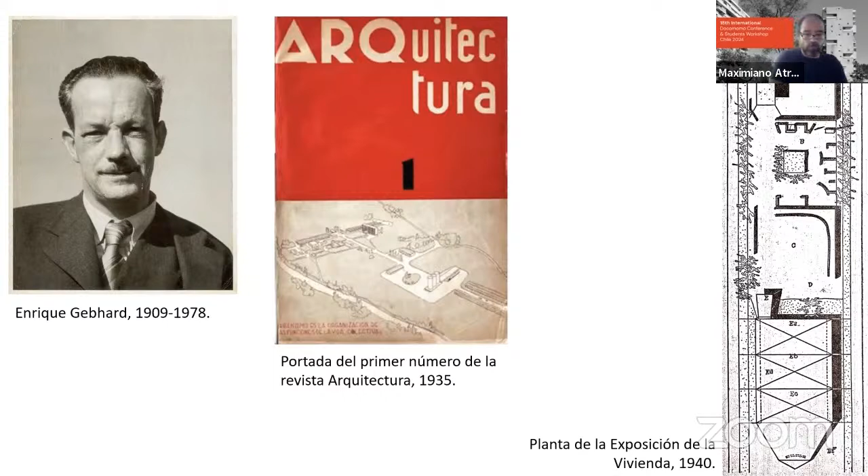In my opinion, the most interesting aspect of this chronology is that the project was developed in several stages. It was not built in one moment, probably due to the financial difficulties of the university during the Second World War, preventing construction of the entire complex as originally planned by Gebhard in 1941. The project was commissioned at the beginning of 1941, and this is the full project he presented to the university. In any way, being built in parts allowed the building, as we know it today, to be a sort of showcase of a development—I expressly avoid the word evolution—in Gebhard's architecture.

Nourished by his own biography, the complexity of his biography, and by a progressive way of understanding the adaptation that architecture should have with respect to landscape, this commission was probably one of the most important of Gebhard's. He developed what we could call a classically modern project, with independent parallelepiped volumes supported by cylindrical pilotis, very typical of modern architecture of the 20s and 30s, arranged at right angles.

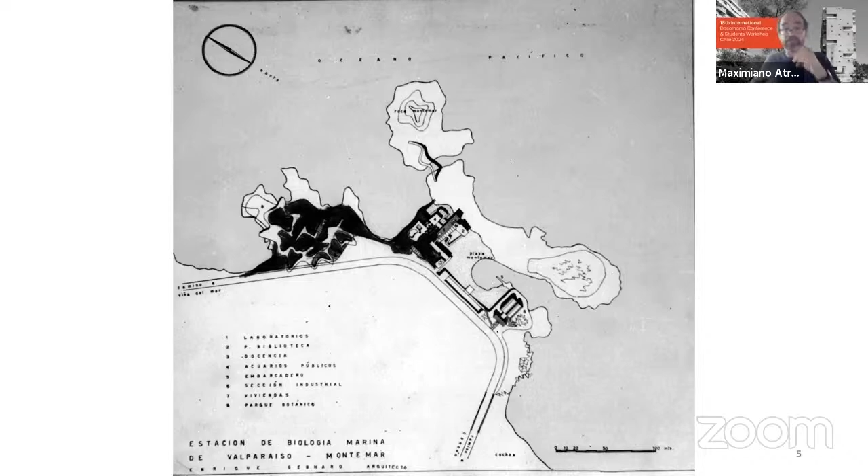As it would happen, this is the first project, 1941, showing the disintegration of the program into independent volumes—we can see 1, 2, 3, 4, 5, 6 volumes. The differentiation of volumes by use could be justified by the foresight that the project would be built in parts, so that each partial construction would not leave the complex looking unfinished. Another consequence was that each time the project was taken up again by Gebhard in the future, it gave him the possibility of updating the design of the parts not yet built.

We will see how this was done in 3 stages: this one, then the second project of 1955, and then the final stage when he redesigned the aquarium, which was the part not built until 1959.

The first part was only partially built. We can see here what was built in 1945, the date of the inauguration of the station: the laboratories building with the square windows and the basement. It's not really a basement, but it's here—a level built in stone—and the volume of the vertical circulation, which is here, and which would later give the place for the connection with the library.

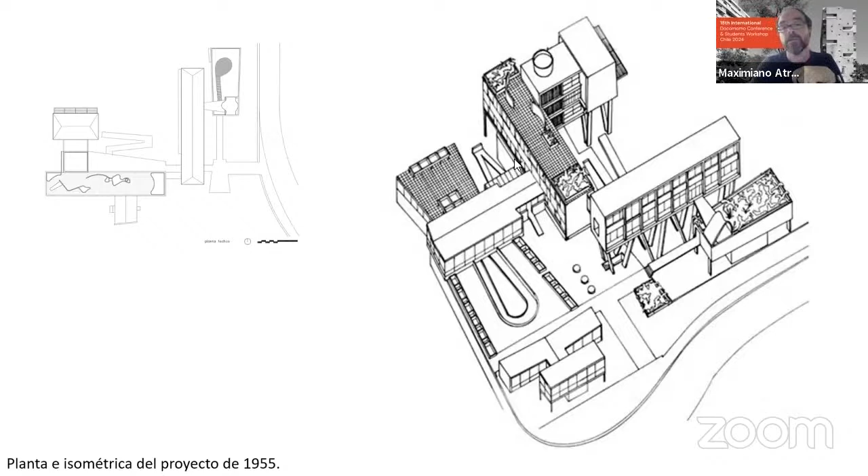But instead of building the volumes planned in 1941 and finishing the original project, Gebhard redesigned the entire station, except for the 2 volumes that had been built originally: the scientific building here with the laboratories, and the vertical staircase volume here.

The second project is radically different from the first and shows the changes that the 14 years of his career had imprinted on his understanding of architecture, in aspects such as structural design, the expressiveness of materials, the integration of art and architecture, and the bidirectional relationship established between architecture and the landscape in which it was inserted.

Between these two moments, we can cite two experiences that had a highly formative influence on Gebhard and probably explain these differences between the first and the second project.

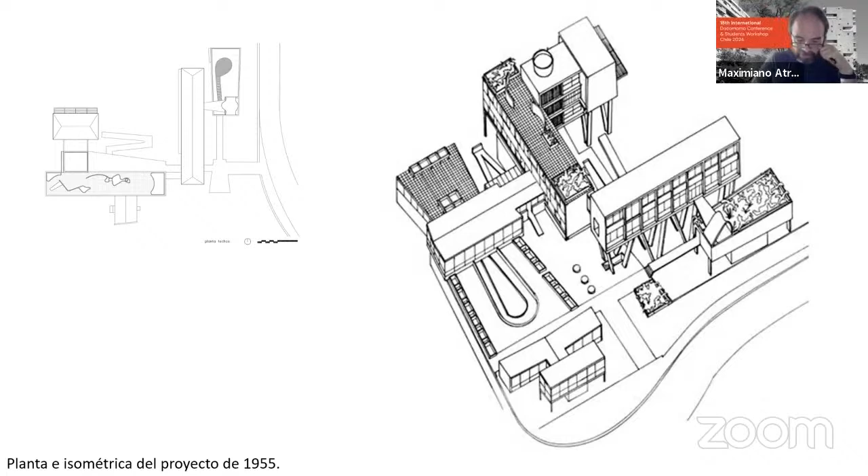He had been invited to participate by his friend Jorge Aguirre, and in this building Gebhard experimented with various elements that would later appear in the second stage of the biology station.

It was a building with a recreational program, with game rooms, a dairy bar, a cafeteria, a terrace, with large windows taking advantage of the open space of the central terrain of the hippodrome, as a landscape that took into account the geographical conditions of the Santiago basin, with views of the Cordillera and the grassy meadows of the hippodrome.

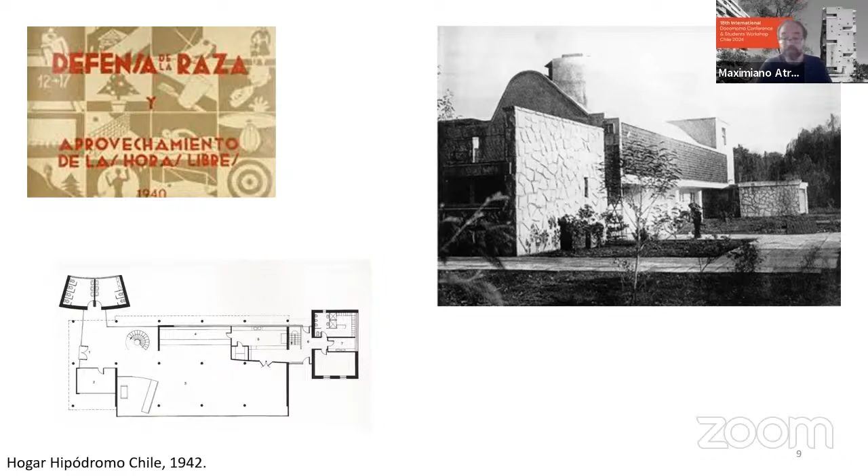The second experience I was talking about was his stay in Argentina, between 1948 and at least 1955. The date of his return to Chile was not possible to fix in my thesis.

First, he participated in the team developing Le Corbusier's Buenos Aires Plan project, led by Juan Kurchan and Jorge Ferrari-Hardoy, for which he stayed in 1948 and 1949, when it was cancelled.

A new railway station was projected, as well as service and residential neighborhoods with several buildings to promote the densification of the center of Bahía Blanca.

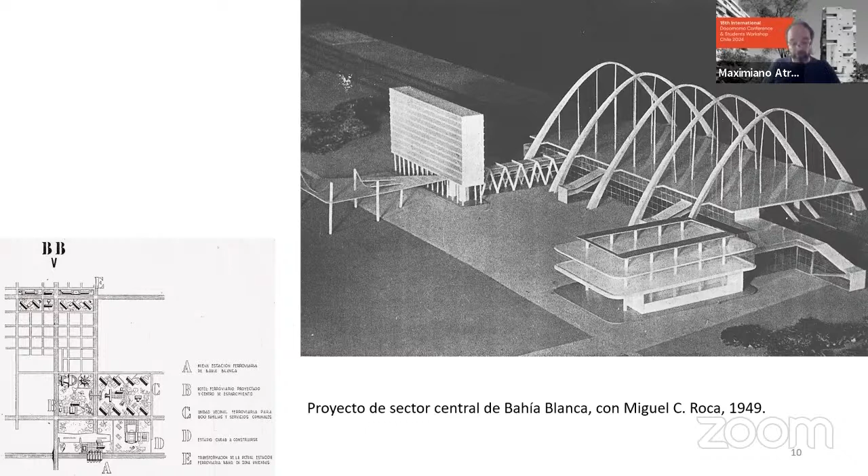The reformulation of Montemar in 1955 was clearly nourished by these new expressivities and experiences, especially in the incorporation of art, with the participation of María Martner, Eugenio Brito, and Carlos González, and with a novel structural solution for the elevated administration and library buildings, which are this one, the administrative building, the auditorium, and the library.

The solution took the basic element of modern architecture, the cylindrical column, and transformed it into a flattened, diagonally exposed column, in order to absorb the dynamic stresses of an earthquake without structuring the building with walls, which would have reduced the transparency of these elements. The relevance of this solution, studied together with engineer Raúl Campuzano, has been demonstrated by its resistance over time, in addition to having been reinforced in 1977 with a thickening of the columns, a solution that was probably necessary, but which radically modified the slenderness of these elements.

In this picture, the modification of the structure was already done. We can see here this double W under the library. These are very thick columns that were slender in the original project.

This was inaugurated in 1959, and at that moment Gebhard proposed a third design, which was left only on paper, with only one drawing that I won't show here, because I just wanted to concentrate on the two moments of the construction of Montemar, in 1945 and 1959.

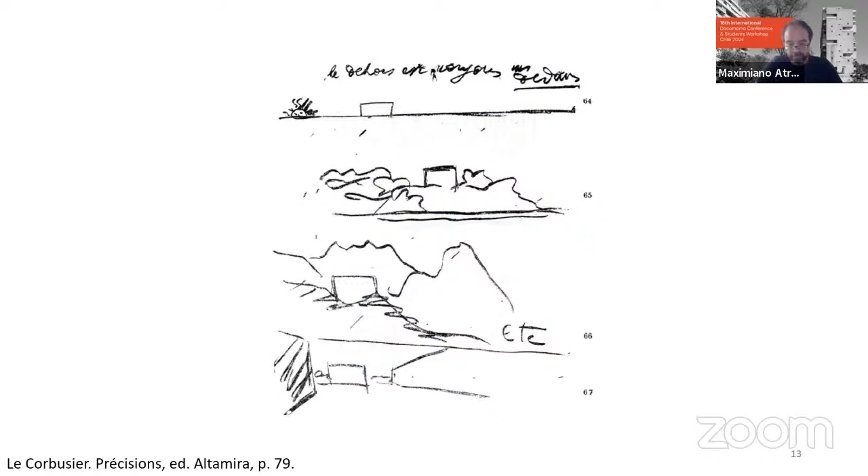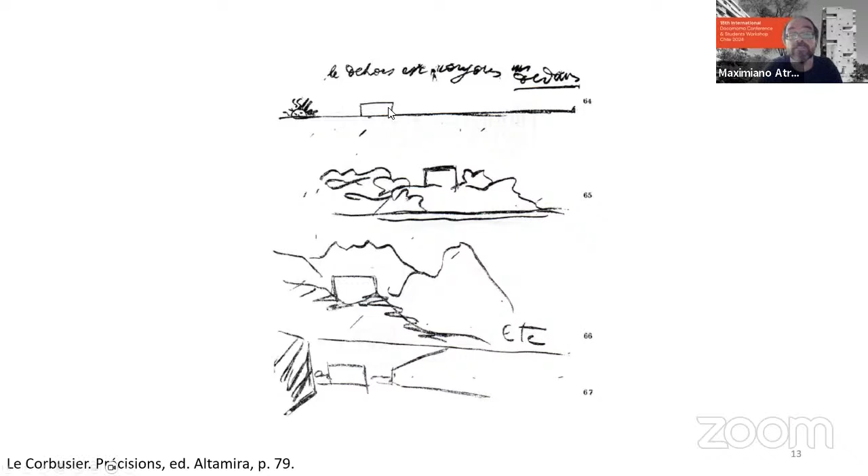This idea, expressed in the purist aesthetics of Le Corbusier's first stage, for example, and recorded in his third lecture in Buenos Aires in 1929, entitled Architecture in Everything, Urbanism in Everything, is related to somewhat abstract and purist aesthetics of the white volume and the differentiation between volume and context, clear in these drawings, for instance, where he expressed this idea of a white box located in different contexts while keeping its pure form.

The architecture of the building responds to these conditions by acknowledging the existence of the rocks, the beach, and the power of the ocean. In the text accompanying the publication I mentioned before, Gebhard writes, quote, a building that deliberately frames its changing landscapes, that doesn't hide the rocks, the sand, and the waters of the sea, unquote.

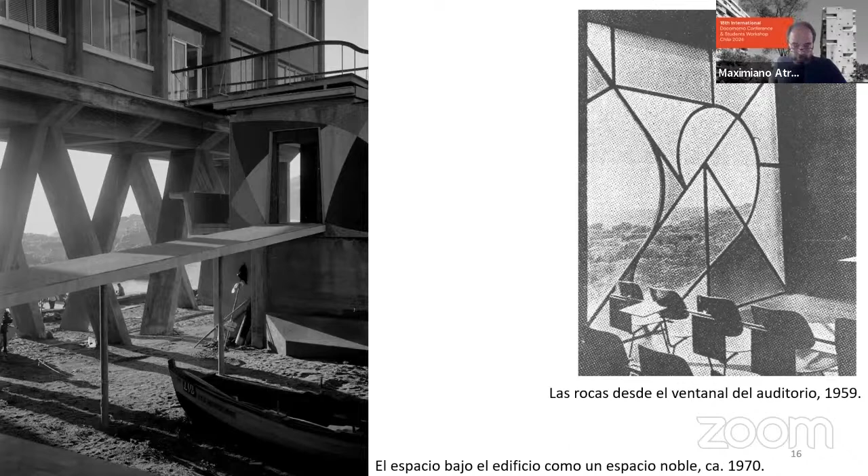Gebhard, in view of the presence of these pre-existing activities, considered the space under the building in contact with the ground as a noble space, while the buildings were raised off the ground to establish a distance and not to block the visual perception of the ocean from the coastal road. The transparency of the building was evident in this gesture of elevating the volumes in 1955.

By the use of entirely glazed facades in the administrative buildings, we can see the change of the window system. Originally, the glass was from the beam to the roof and was very transparent, so from the road, we could see the ocean across the building. In this picture from inside the auditorium, there was this window with a very interesting design that allowed people inside to see the rocks on the ocean. This is not possible today because the window was closed.

Finally, in this third part, to conclude, I would like to make some reflections about what has concerned us about Montemar in Docomomo, Chile, and the state it is in today, in the light of possible actions of valuation and recovery. Montemar today is a sick building.

It urgently needs actions to repair what has been destroying many of the architectural values I have been mentioning. I am not only talking about obvious deterioration, which becomes even more serious in a highly corrosive environment such as the first line in front of the sea, exposed to the direct blow of salty sea breezes and waves from tidal waves, which happen very often. This damage has been recorded and is clearly an urgent concern.

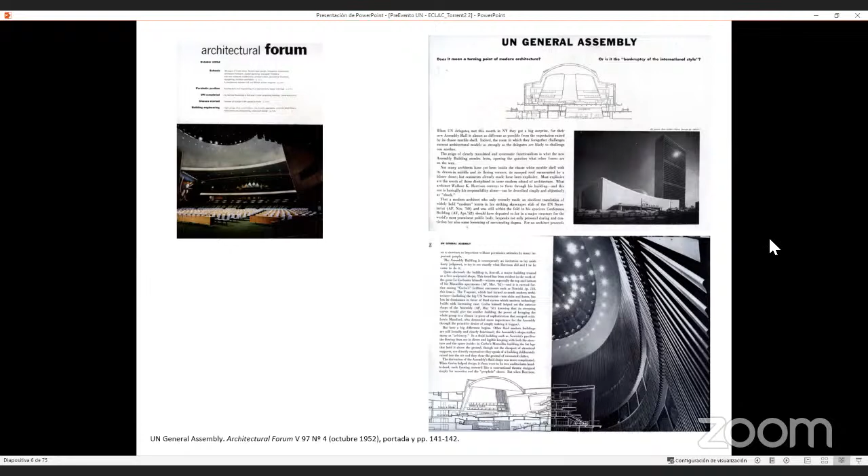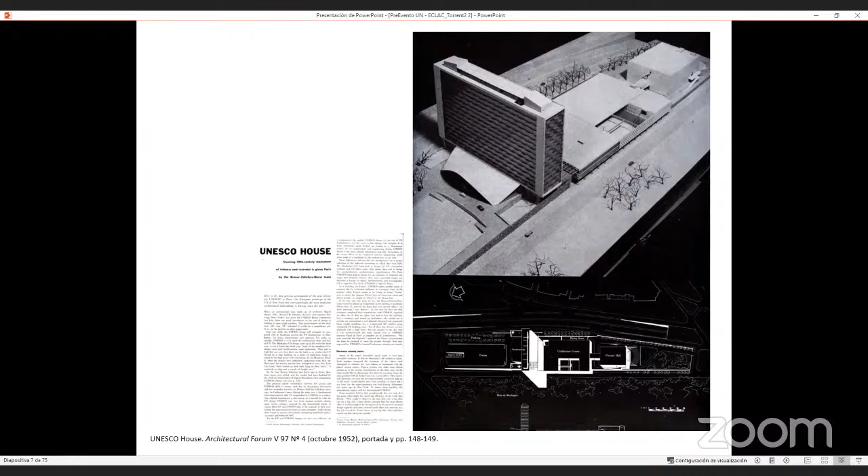The project for the UNESCO headquarters in Paris also had a controversial trajectory, with changing designers and projects and numerous criticisms on the final building. Architectural critics assumed that the building for the United Nations could not represent the meanings that the spirit of the newly born international organization was proposing to the world.

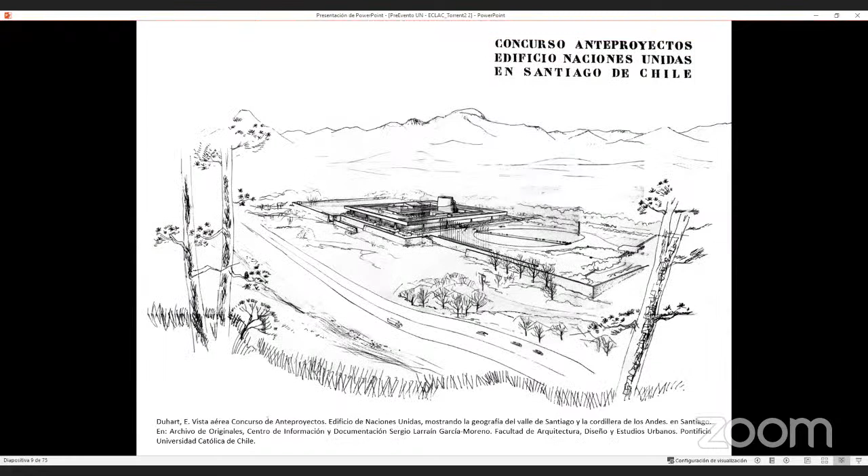The issues of a new monumentality reflecting political and cultural significance should have been reflected in them. At the end of 1957, Dag Hammarskjöld, the United Nations Secretary General, accepted Chile's offer to build a United Nations headquarters in Santiago. In 1960, a competition was held to which 14 proposals were submitted.

The jury, composed among others by Henrique Mindlin from Brazil and Sergio Larraín from Chile, distinguished 4 proposals sent to New York for the final selection, which was made by Hammarskjöld with the advice of Wallace Harrison and Philip Johnson. The award went to Emilio Duhart and his collaborators, Roberto Goycolea, Cristián de Groote, and Oscar Santelices. It was not until 1966 that one of the organization's peripheral headquarters would have a building worthy of its significance.

Inaugurated on August 29, 1966, the United Nations buildings in Santiago de Chile later housed the Economic Commission for Latin America and the Caribbean, ECLAC, an institution created in 1948 to promote the region's economic and social development. The complex is located on the banks of the Mapocho River, which ran through the valley of Santiago by the Andes.

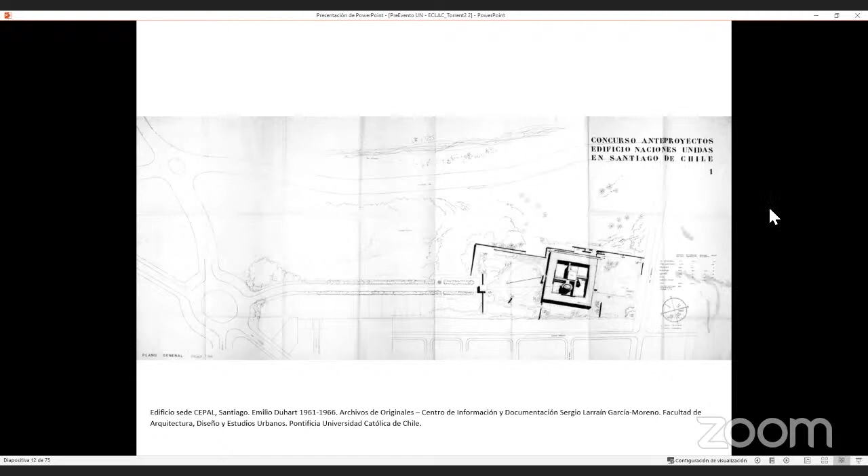The statement submitted to the competition was clear and straightforward. The United Nations building is conceived as a house and as a monument: the house for the nations in community, the monument a visible expression of their spiritual and social character. House and monument emerge as a plastic and functional unit, legible to all, a monument for the nations, a monument for its meeting point, Chile, in consonance with the space of Santiago, its mountain range, its lands and its climate and its flora, with the temperament of its people. A palace expressed geometrically in front of the cosmic complexity of the Andes.

The submission conceived a set of buildings where a central piece assumed the task of monumental representation. The building's plan is based on a 96 by 96 meter quadrangle, about the urban dimension that confronts the vast space of American geography.

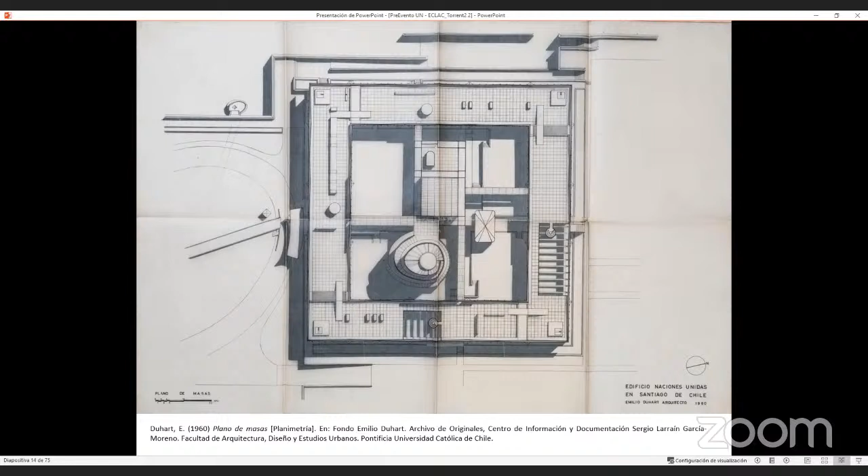Destined to house the offices, the quadrangle, or ring, in the outer definition, encloses vast inner spaces where three extraordinary buildings are set: the caracol, or snail shell, a conical helicoid containing the assembly rooms; the diamond-shaped volume which houses a conference room; and the service core, named Núcleo, linked to the quadrangle by a series of pedestrian bridges.

I hope you can identify any building inside of the quadrangle. The caracol, the snail shell, and the small rectangular is the diamond-shaped volume, and the huge one is the Núcleo. Both bridges and buildings qualify the inner void into 4 courtyards or patios.

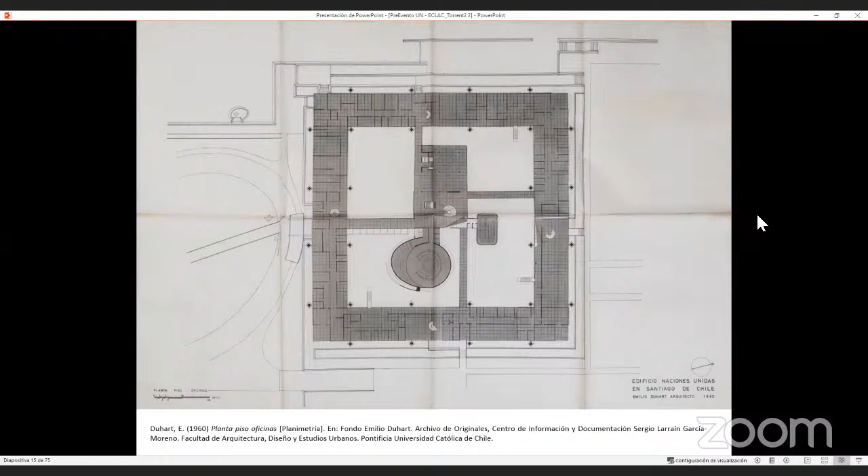The ring is an autonomous single unit, a continuous pavilion suspended over ground level, hanging from a structure above. This structure consists of a succession of post-tensioned concrete elements supported on 2 continuous lateral main beams. These rest on 4 columns aligned on each side of the quadrangle, cantilevered at the corners. You can see here the first floor plan, the main entrance plan.

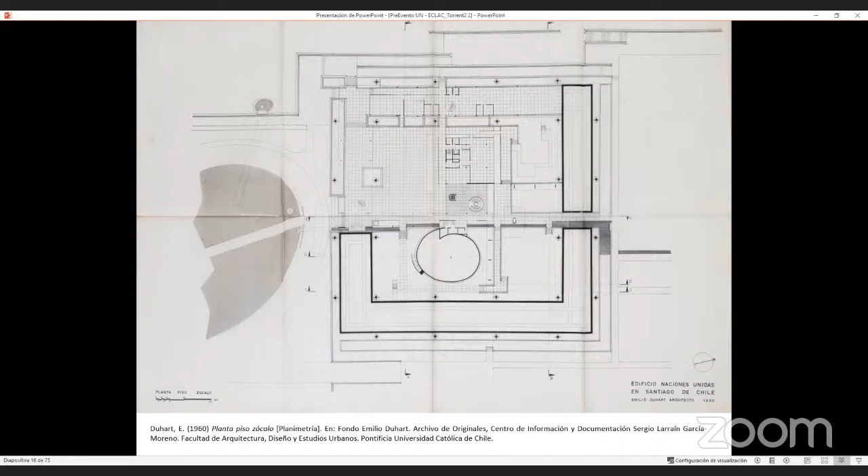An essential solid volume, the Núcleo, contains 5 indoor levels, 2 of which establish the underground connection, concentrating service, equipment, and facilities. But it also constitutes the core of the ensemble, reuniting the 4 bridges you can see there in the plan, connected to the quadrangle and the entrance halls to both assembly rooms on the caracol.

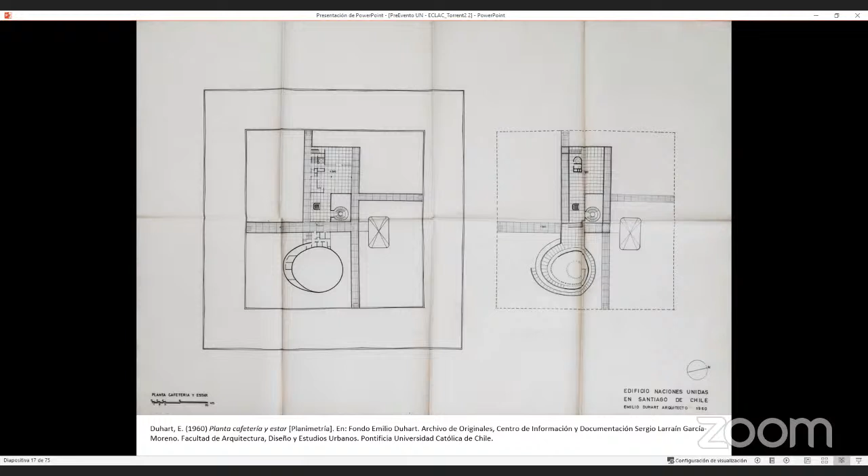On its roof, a lookout terrace encompassed a folded slab, providing an outdoor auditorium, with 2 cylindrical shapes, one corresponding to the vents and the other to the main staircase that led to the terrace. This, however, was never executed.

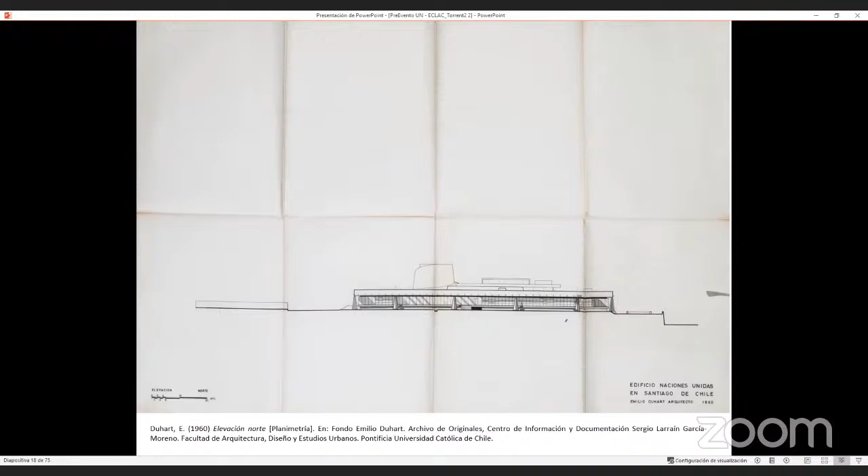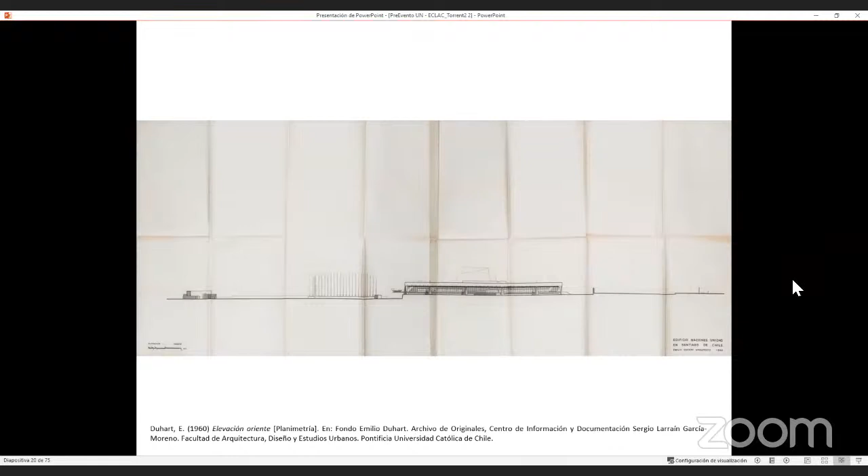The diamond was a polyhedron, hence the name, that hung high over one of the courtyards on a folded structure cantilevered from only 4 structural points. There are the sections.

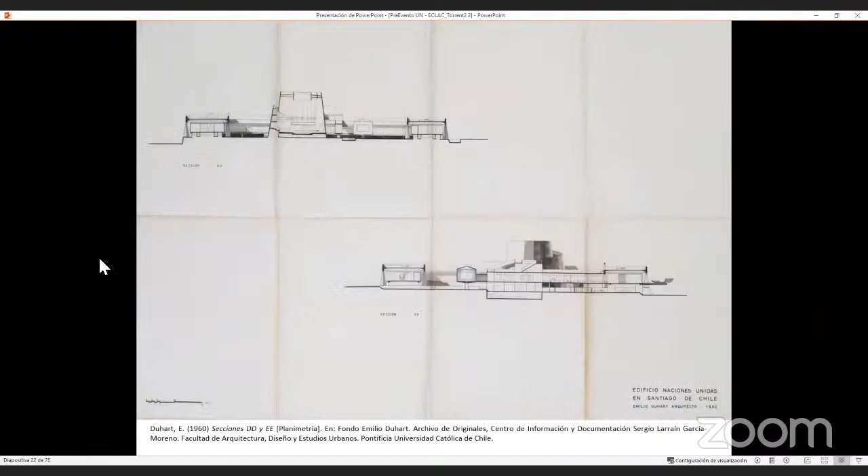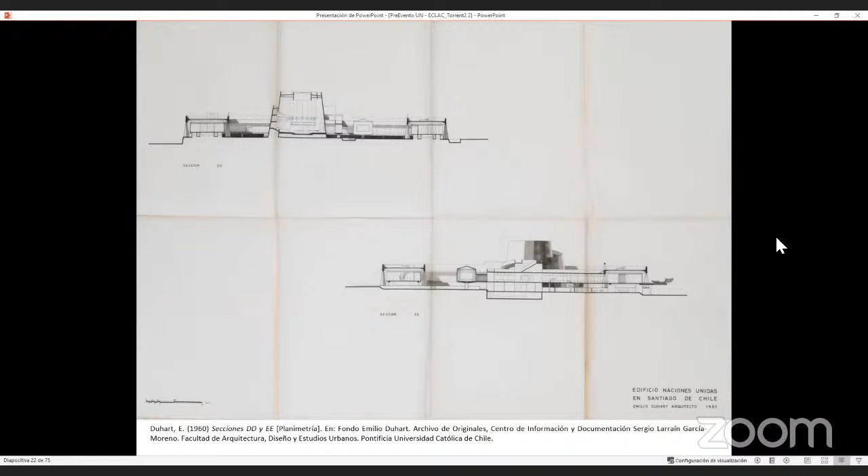The caracol is, however, the most crucial element of the complex. Its form is intended to symbolize its function, a place for discussions leading to the establishment of the future pattern of development for Latin America. A conical helicoid in a truncated cone shape, formed by a double skin of concrete that shifts to accommodate an external staircase, culminating in a lookout terrace. Inside, it houses 2 overlapping assembly rooms for the commission. The main one has a magnificent spatiality generated by its 15 meters height.

The completion of the building involved numerous technical challenges. Constructional audacity, structural boldness, and material prowess in the design were closely connected with the work's visual expression and monumental significance.

The architect himself acknowledged that the structure represented, and I quote, a major effort in design, analysis, calculation and execution in construction. Still, it was only during a project like the United Nations one that we could and ought to build an architectural and technical complex with the structural characteristics of this building.

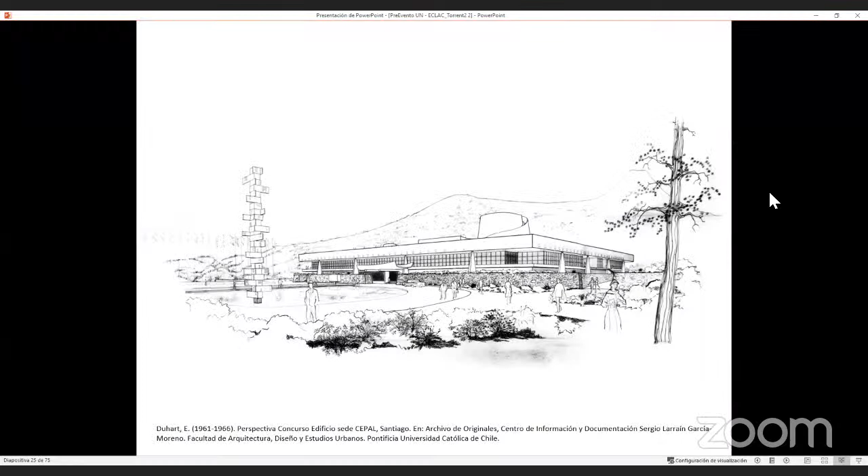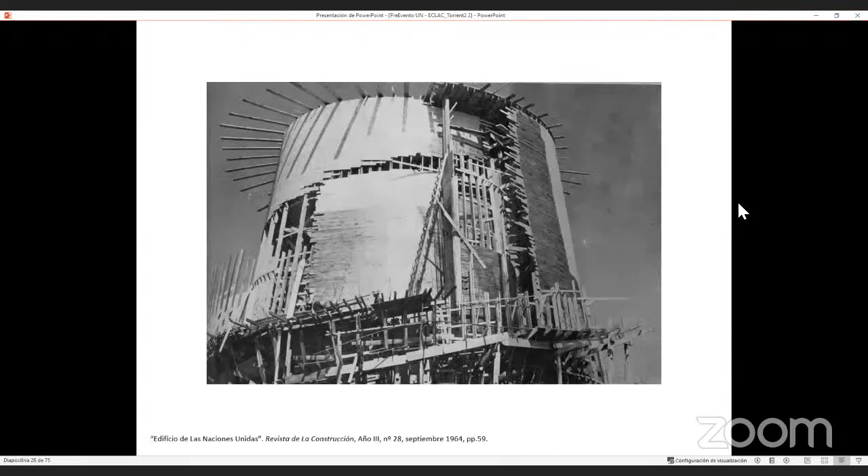This can be seen in the effort to maintain the open plan under the ring, the presence of the columns on the floating corners, and the sculptural definition of the snail. This strong structural definition appealed to the memorability of the image, while the topographic treatment of the slopes and courtyard gardens would attenuate it. And here I have these 2 pictures with the building under construction, just to take a look at the complexity of the construction and the calculations involved.

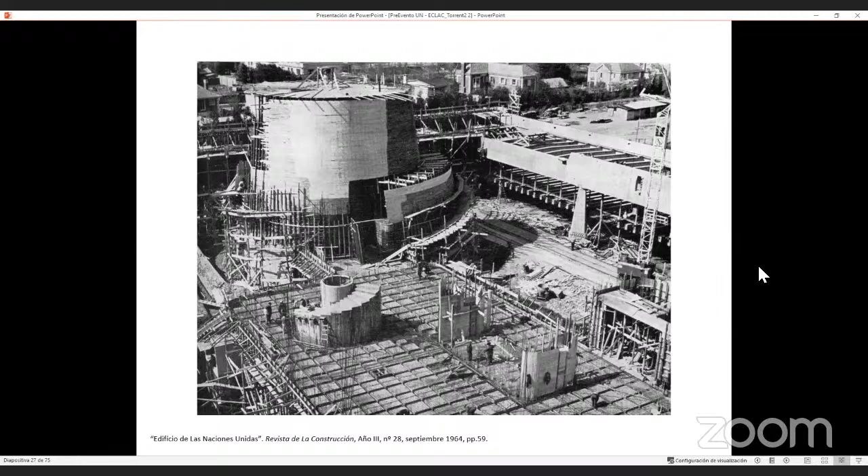The relevance of the ECLAC building in the context of architectural production worldwide lies possibly in the distance that separated it from other expressions of the time, in Duhart's uniqueness for knowing how to situate this work given the conceptual density that conceived it.

Duhart was aware of the new dimension in architecture in line with the ideas of new monumentality recognized during his stay at Harvard. As he stated years later: '20th century architecture shows, since post-war years, a natural evolution towards increasing incorporation of the expression of geographical and historical values specific to each cultural region.' The achievements of his building are evident, a kind of modernism that already constructed and surpassed the abstract schemes of previous United Nations buildings.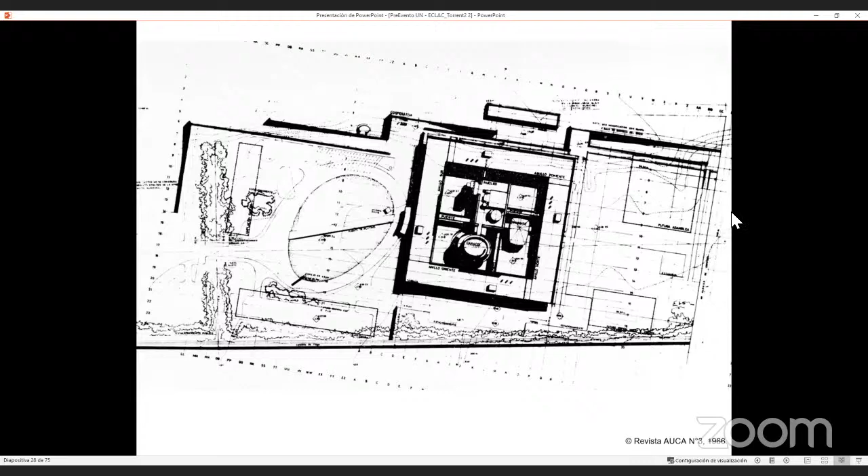It was time to generate a new approach filled with significance. Duhart assigned several critical references to understanding the building. The first rested in its metric definition.

The quadrangle matched the size of the Manzana Fundacional, the block that characterized Spanish foundation cities in America, in a clear allusion to the urban tradition having to face the colossal dimension of the landscape in the Andes. It also assumed a precise scale, adjusted to that of the colonial city where horizontality prevailed.

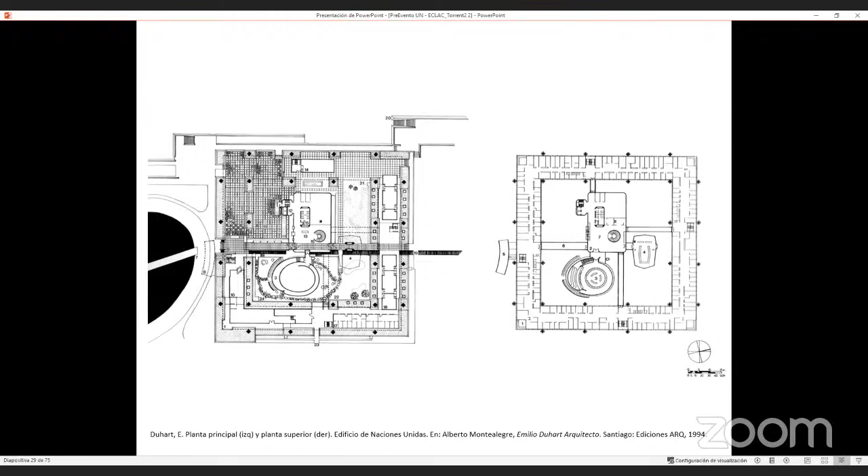So did the presence of the wall, contracted only with one entrance along the entire lateral sides. Finally, it scaled the inner landscape according to the customary dimension of the courtyards belonging to the Chilean traditional houses. That was the way traditional houses in the main Hispanic foundation cities in America were done, with four courtyards in the block.

But simultaneously, the building conveyed a concept of eagerly modern space. Unlike the traditional confinement given by the adobe walls of traditional houses, the free plan allowed by the hanging volume permitted continuity of space, enclosure, and transparency between the inner courtyards and the outside.

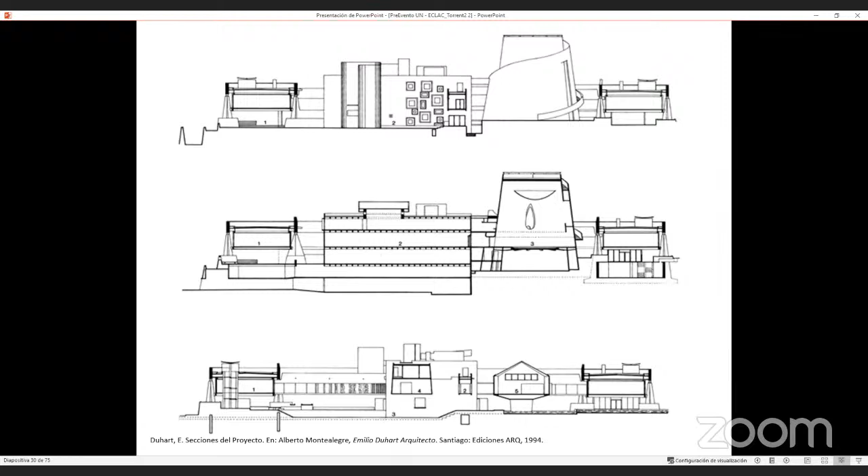You can see this in the sections, mostly in the first and third sections. You can see the open space and the space in a kind of centrifugal action going outside the ring.

The choice of forms referred to pre-Columbian American monumentality with the needed autonomy not to replicate any specific formula. The truncated cone with its elliptical paths could be a remembrance of both pyramid and observatory, but it remained at the same time a novel concept emergent from its function.

Its height and presence in the complex highlighted the dominance of the assembly over bureaucracy, reversing the functionalist schemes that Mumford criticized for the United Nations New York headquarters.

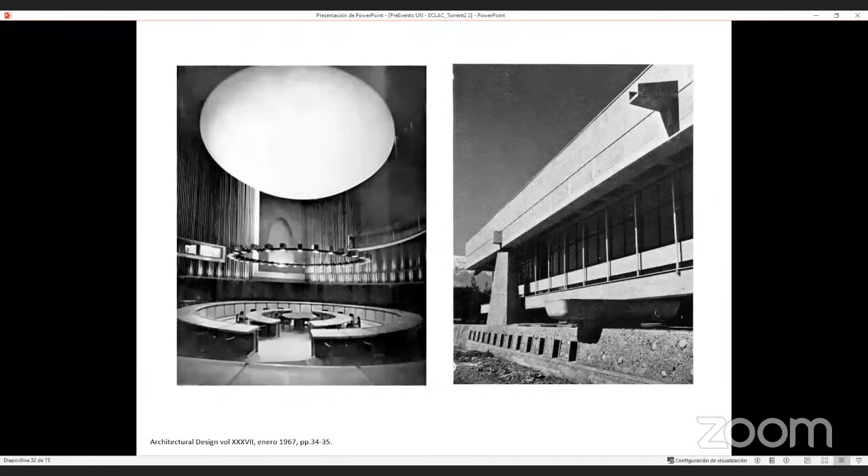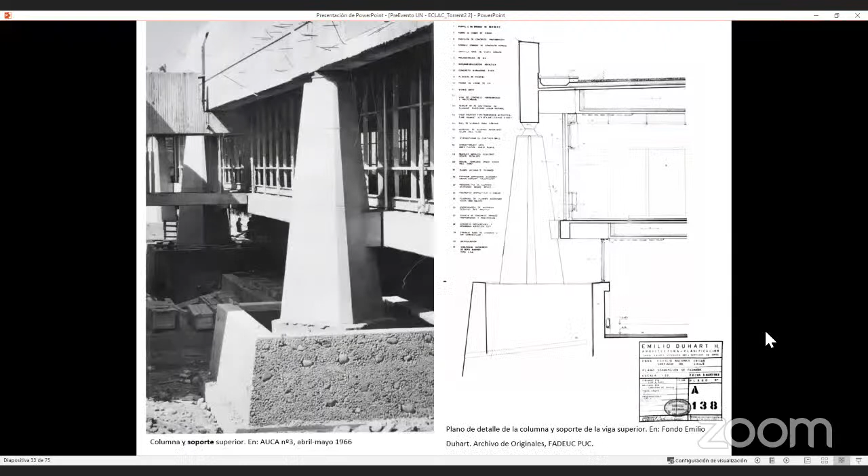Several details propose a vocabulary consistent with these more excellent definitions. With their pyramid aspects, the square-based columns anticipated a distant relation to those offered by Mies van der Rohe in the Bacardi project, while expressing formal autonomy.

The main entrance featured a marquee shaped like a cantilevered tile supported by two beams projected from the facade. Once again, a sculptural shape associable with the traditional forms of Latin American construction appears in an unexpected situation, building with elegance at the main points of the facade.

No doubt his experience with Le Corbusier approached the exposed concrete condition being discussed in global architecture culture at the time, imposing an aesthetic dimension accompanied by an orthodox integration of works of art: the symbolic narration of humanity's history in the bas-relief, or the workers' handprints on the walls of the main facade, traits of symbolic significance strongly distanced from similar architectural approaches in Latin America.

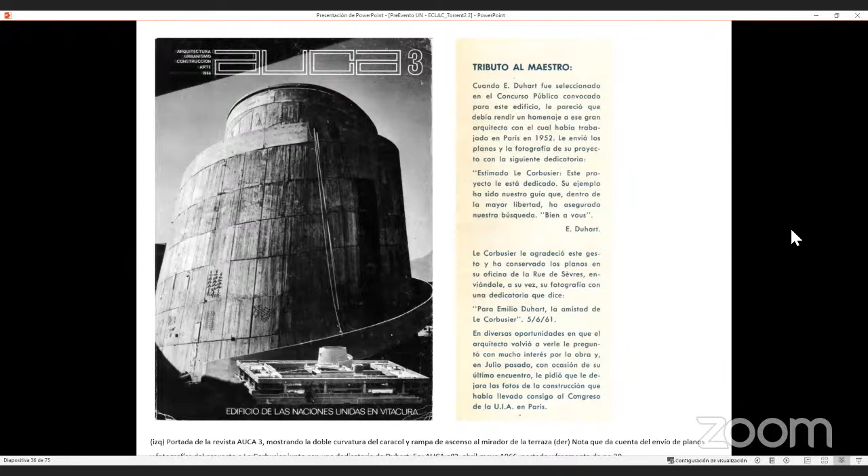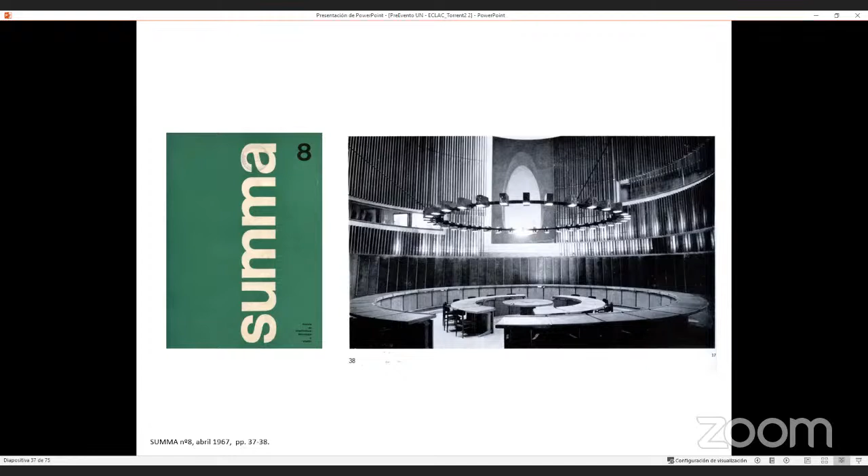The Argentine magazine Summa highlighted the symbolic value of the building, not only for its institutional condition, but also for its formal characteristics and the plastic resources used. While noting an approximation to Le Corbusier, the emphasis was placed on the reflection on the geography and traditions of Chilean architecture, achieving something more than mere translation.

This was the picture published in Summa, which is quite different to the other, because you can see there the beam on these four columns and the ring hanging from them.

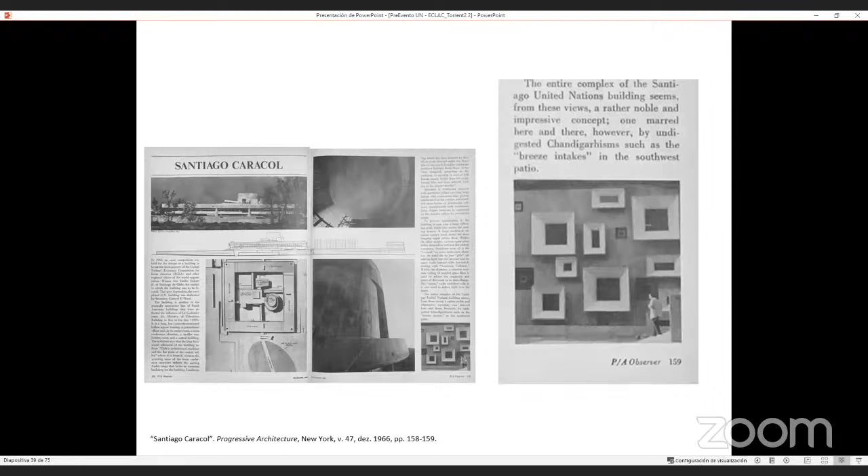The building was also published in Progressive Architecture, with a text based on the author's description, but that ended with a direct critique, and I quote: 'The whole complex looks, from this view, a rather noble and impressive concept, one marred here and there, however, by an undigested Chandigarism, such as the breeze intakes in the southwest.' So the word is quite bizarre, Chandigarisms, it seems to be related with Chandigarh.

The canonical interpretation gradually identified the building formally and physiognomically with the Assembly Palace of Le Corbusier. Many critics endorsed this idea of similarity between both buildings. Brown, in 1988, warned that it was improper to understand the work under the sole optic of Le Corbusier's influence, yet he also affirmed an analogous relationship in its general parti, materials, and language to the Assembly Palace.

Adding as confirmation the dedication of the project that was published in AUCA, the consecration of the canon occupied a preponderant place in countless publications. The paradigm of influence can be read in numerous publications reiterating the comparison to the Assembly Palace.

The argument is reproduced in the catalog of the recent exhibition about Latin American architecture at the MoMA, where it is stated that Duhart had worked with Le Corbusier on the new Punjab capital at Chandigarh, a project recalled here in the distinctive conical forms of the ECLAC Assembly Hall, which rises above the roof line of the open rectangular frames of offices, creates a sky-high lighting for an inward-looking meeting room and offers a public observatory of the roof. The recurrence of the canonical narrative is verified without significant enrichment.

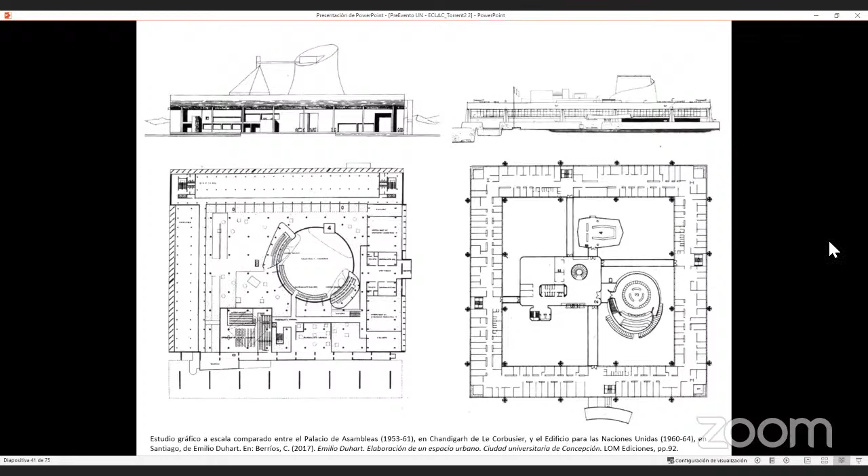As we have seen, there is no shortage of critiques that repeat the argument of influence. The project dedication published in AUCA has been frequently used to affirm the similarity between the ECLAC building and the Corbusian structure. The project, of course, has an affinity to the Assembly Palace, but we must see the difference.

The dedication clearly warned that the example of the master had been taken freely, a part that has habitually been eliminated. Duhart established distance from the master in some interviews, stating that he knew it was closer to a state of mind than to formal solutions. He was clear in his speech when receiving the National Architecture Award, stating, 'it was good that I had enough autonomy to receive the influence of that great creator without being irradiated, as happened to some of his younger collaborators.'

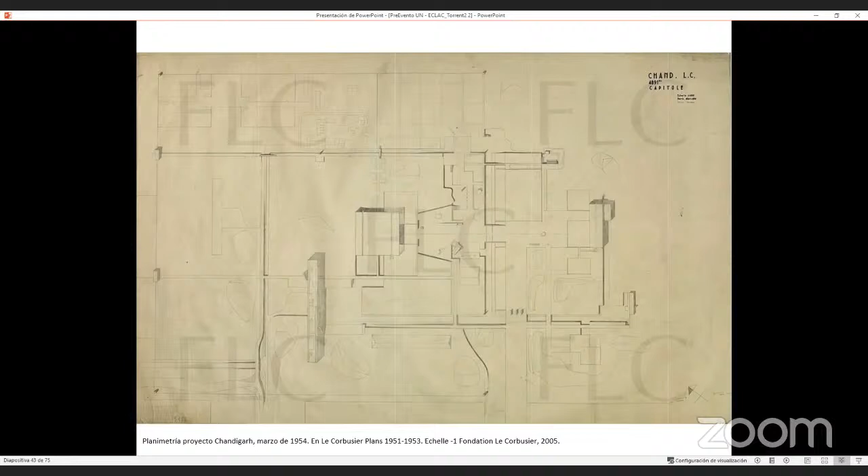The period he worked with Le Corbusier has always been an argument for establishing formal connections. Duhart came to work briefly at Atelier 35 Rue de Sèvres in 1952, when he was already 35 years old and had developed a remarkable career in Chile. He did not seem a very impressionable young man.

Recent, serious and documented research indicated that he did so between late April and early July of that year, probably after Le Corbusier arrived from his trip to Chandigarh and when an accident prevented him from continuing his assignments. His participation consists mostly of only one sketch for the Secretariat building made during May, and 141 hours of work, according to the fiche horaires, the book recording the hours of Le Corbusier's collaborators, during June dedicated only to the Villa Shodhan.

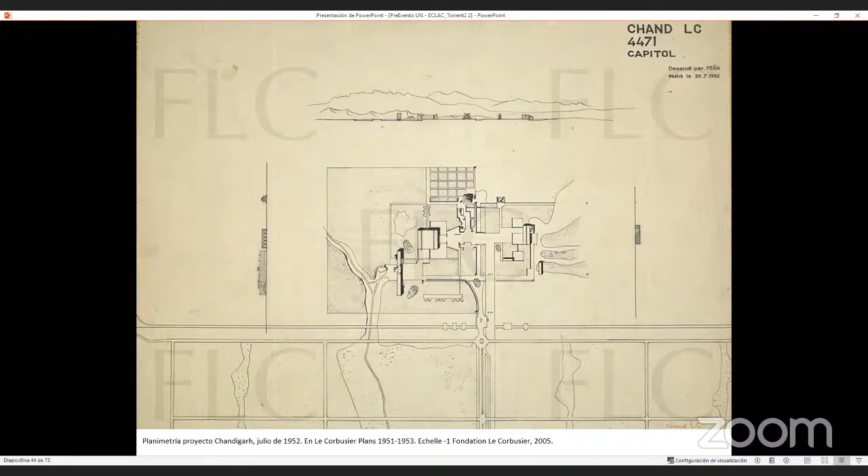It seems essential to remember that for the month and a half or so that Duhart was at the atelier, the project for the Assembly Palace was still in its infancy, at its very beginning, with no volumes protruding from the roof.

This is an approximation of the other plant we just saw. The Palace of the Assembly is in the center, with only 2 inclined roofs and a huge space in the middle, without the conical forms habitually seen in the plans of '56. So the roof was mostly straight and without difference, and it was a huge inner space.

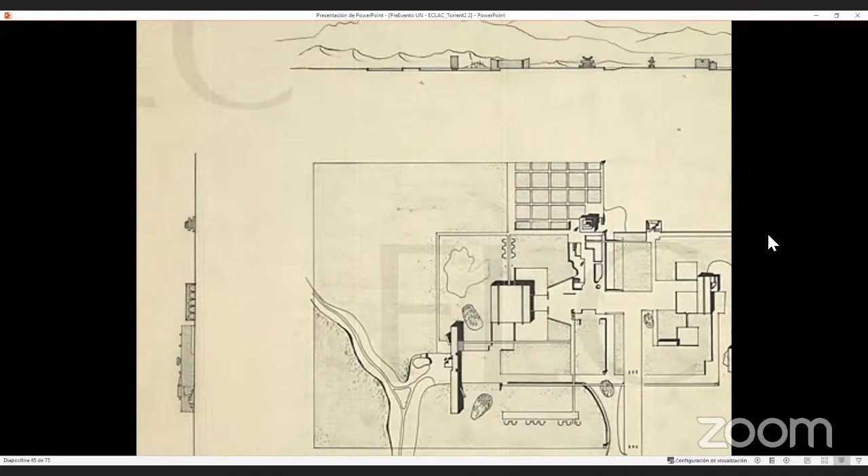Those 2 months working at the atelier with no direct relationship to the Assembly Palace fixed the interpretation of the building. The critics' operation was based on the idea of influence and a physiognomic reading that affirmed the resemblance. A typological analysis would be enough to see the difference. Indeed, the square composition and the prominence of a protruding shape seem apparent.

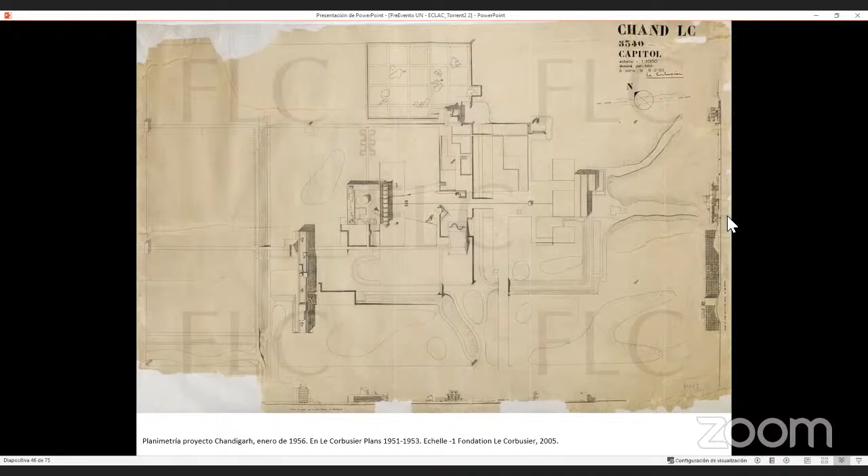However, the most significant difference resides in the structure of the courtyards versus the enclosed space of the hypostyle hall. The radically different fact undoubtedly lies in an aspect that has often gone unnoticed: the free plan of the noble floor, caused by hanging the upper floor from the ring supported only by 4 columns per side. Architectural research might dismiss the similarities that can be quickly established. It's a hanging structure, it's not a hypostyle hall, and it's a ring with an inner space and a free plan in the basement.

No one who knows architecture would say it is a copy, stated Duhart, further clarifying that Le Corbusier detested copycats. An emphasis on spatial reading would ratify the differences.

The building programs grew during the project definition and construction phase, when it was destined to the CEPAL-ECLAC, Economic Commission for Latin America and the Caribbean. Since its inauguration and through 3 decades, the functions have increased, occupying the diaphanous floor under the ring. Towards the mid-2000s, a revaluation process was initiated to preserve the building, including clearing the successive additions.

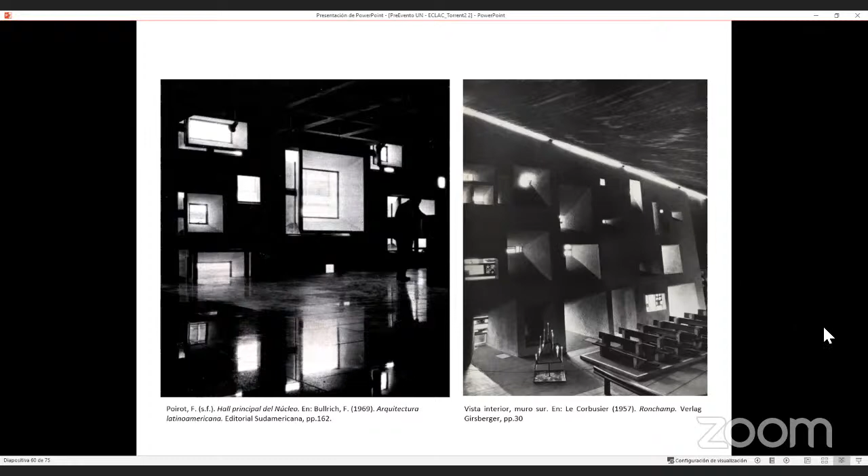The supposed identification of the original author with the master made it possible to assume the use of Le Corbusier's color palette. Light blue, pink, and yellow from the 20s palette have been used on the interior walls of the core, different from Duhart's palette, which was stronger, with a dark green.

It seems like a minor operation, but the light intensities are different, losing part of the spatial qualities due to the lighting effects. Likewise, the library renovation was done in white, replacing the tone of the surface woods made of local Surinamese and precious woods from Belize, which were donated by these countries for the original building.

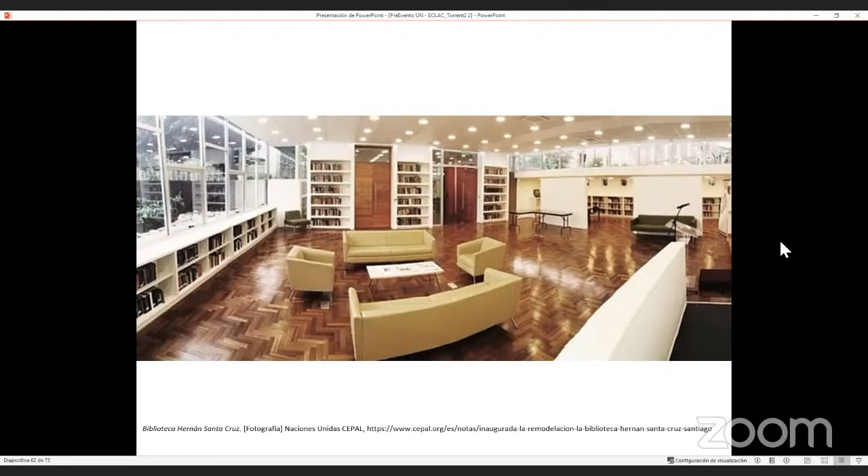This approach presupposed the existence of a symbolic capital added to the building because of the relationship between its author and the world-renowned architects—that is, the relationship between Duhart and Le Corbusier. Once this is assumed, it becomes a habitual condition where it is no longer known how it was acquired, appearing natural without identifying its origin, becoming an apparently objective condition.

The interpretative paradigm has dominated the practical sense of those who work in the institution, both for cultural diffusion and architectural intervention. The criticism has placed a remarkable building in a troublesome position. However, the revelations that can be offered by a building that assumes an uncomfortable canon are not few, indicating that further studies in the context of the author's ideas can provide exciting conclusions.

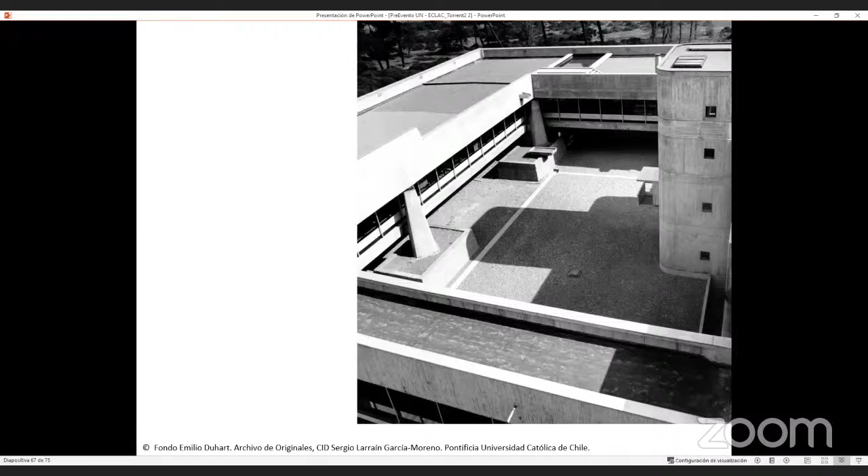The fourth is the system of reference to the past, both to the colonial Ibero-American courtyard houses and the formal reference of the cone to the monumental dimensions of a pre-Columbian past.

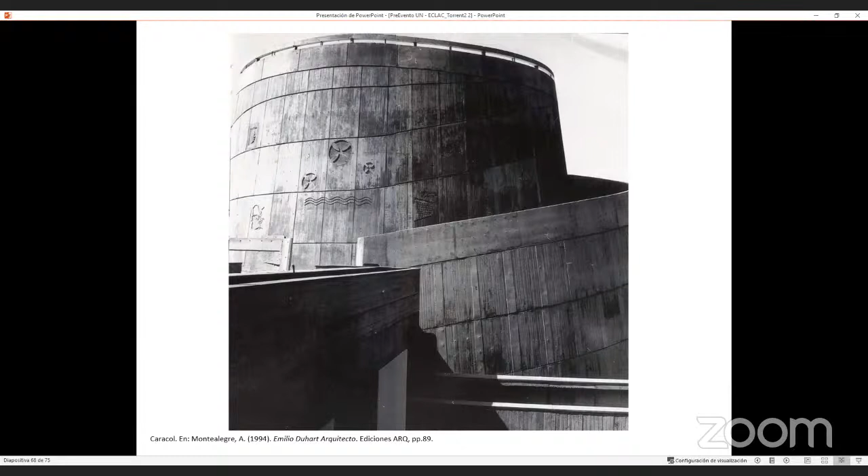Finally, the system of cultural and collective representations, such as the integration of arts, the bas relief of the history of humanity in the ascending path of the snail.

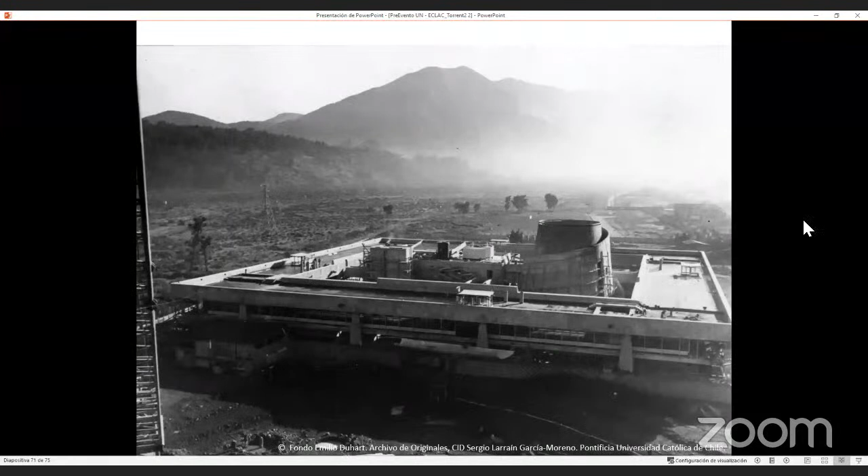The building meets most of the points claimed for the new monumentality, from the application of new materials and techniques in new structural conceptions, the care in the location, the relationship with geography and nature in the courtyards and gardens, the integration with art, among others, satisfying the collective inspiration of joy, pride, and excitement that was said in the memoir.

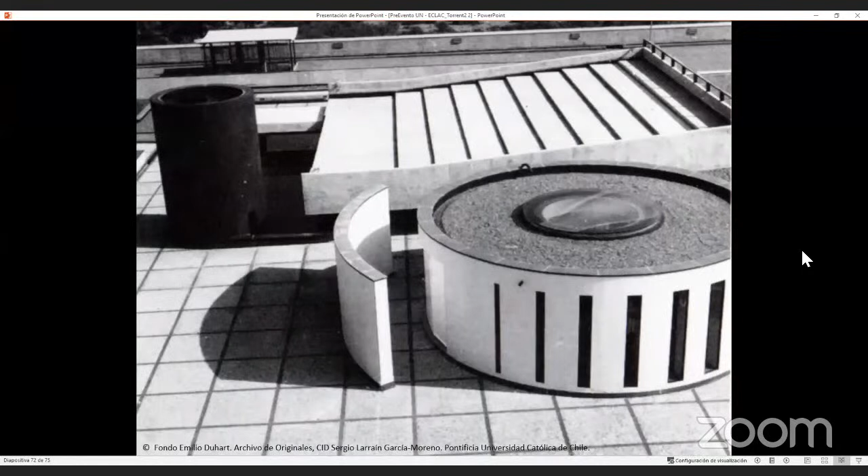An intervention properly made and lacking presumption can measure itself with a multiple dimension of quality encompassed in works that become modern movement masterpieces, such as the United Nations building in Santiago.

It existed in modern architecture and still exists among its built evidence. A collective dimension expresses itself in the development of a sharp aesthetic. This search for representation overcomes and even exceeds individual creativity.

For the same reason, all contemporary intervention to be performed on modern architecture will find as main contender the sheer quality of its original resolution.

To overcome it, however intense, should compromise a dose of creativity equal at least to that which modern architects such as Emilio Duhart put into action in each case. But that means reading the building in its originality.

Thus, the main task for active sustainability of a modern monument lies in assessing its material dimension and decoding its opportunities for design in a contemporary key, keeping at the same time its original significance. Thank you.